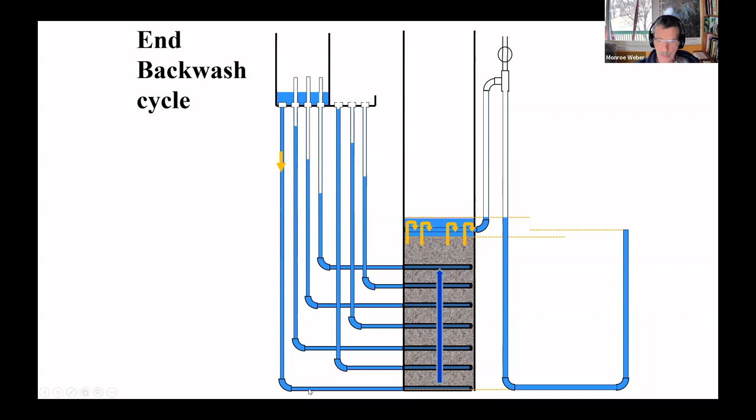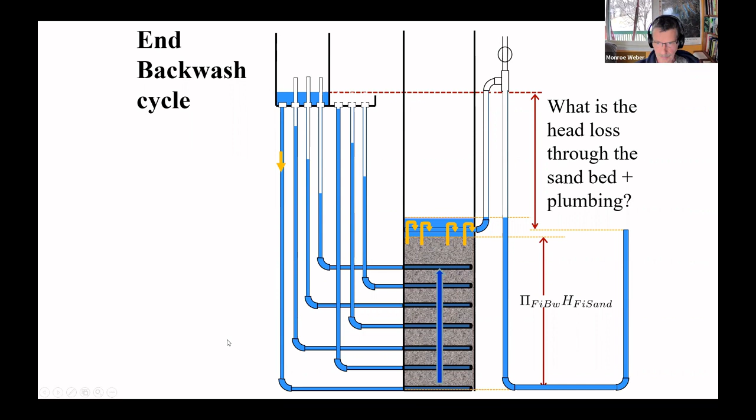That was that. That's the head loss through the sand bed and all the plumbing, both the inlet plumbing and the outlet plumbing through the siphon pipe. And what's this going to be? That is the depth of the sand. So this pi factor is the ratio of the backwash height of the sand divided by the height of the sand during filtration. And so that's the height of the sand during backwash. And I think that's that.

Notice that these pipes here have little pipe stubs on them, and those pipe stubs make it so that their inlet level is higher than the water level during backwash. So that makes each of these pipes high and dry, and hence turned off, because it's not even in the water when you're in backwash mode. If you didn't have these pipe stubs installed, can you see what would happen? Then there wouldn't be any air in any of these pipes.

And can you see what would happen? Remember, water wants to take the easiest path. And the easiest path would be to go in this top inlet, and at that point the sand wouldn't be fluidized, it would just skip all the sand. Do you see this failure? If I don't have these pipe stubs, then when I think I'm going to start backwashing, instead the water says, oh, I'll go in this pipe and pop out right at the top of the sand, and I won't bother fluidizing any sand.

So these little pipe stubs are absolutely critical so that during backwash mode, when the water level is low in the inlet, water can't get into any of the other inlets. It can only get into the inlet that we want it to go in, the backwash inlet.

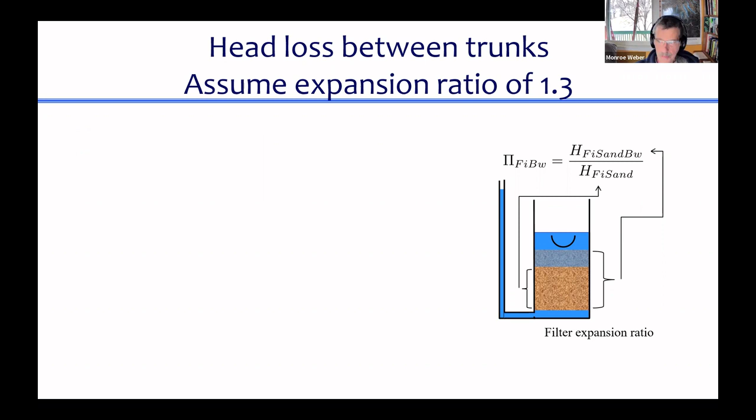So I'm going to use that relationship to figure out what's the head loss between two layers of sand, between two pipes, like between these two pipes, or between two that are adjacent. And between two that are adjacent, there's 20 centimeters of height between them, but there's not 20 centimeters of settled sand when the sand is fluidized. There's 20 centimeters of fluidized sand. And so the actual amount of sand is less. So let's figure out how much equivalent settled sand would be in there.

So we have this relationship between the height of the filter sand during backwash and when you're in filtration mode. So we can solve for the height of filter sand, given that we know the height of the filter sand that's being backwashed between two layers is 20 centimeters. So HFI sand, that's the settled depth of sand. This height of filter sand that's in backwash mode and is fluidized is actually 20 centimeters. And the result is that there's 15 centimeters equivalent of settled sand in between two pipes when it's fluidized in backwash mode.

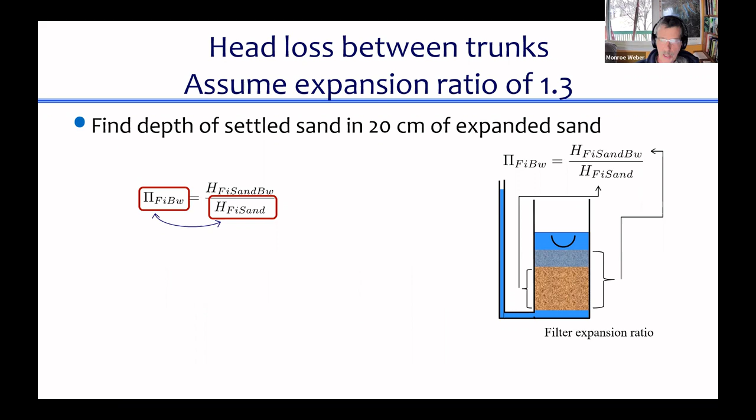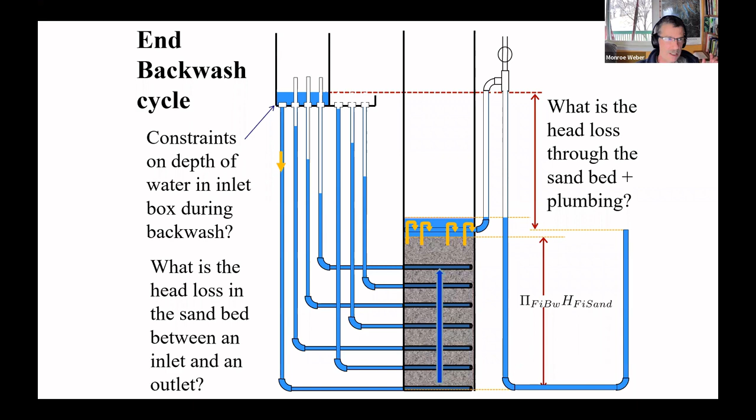So this is the head loss per 20 centimeters of expanded bed. So going back to this slide, the distance between this water level and this water level, the distance between two adjacent manometers, should be roughly 15 centimeters if the filter is expanded. I showed a graph like this a week ago, except it looked different.

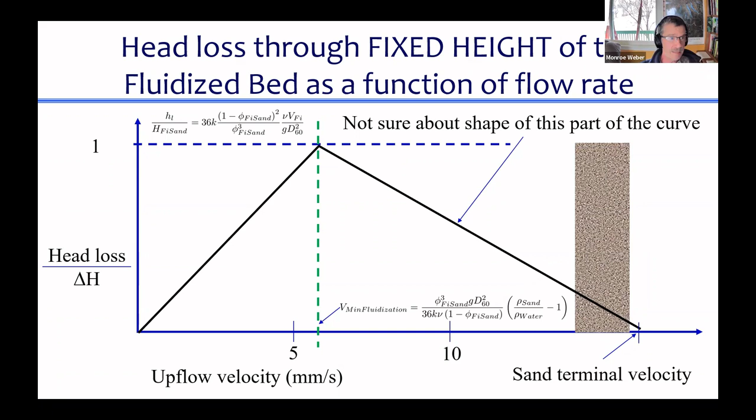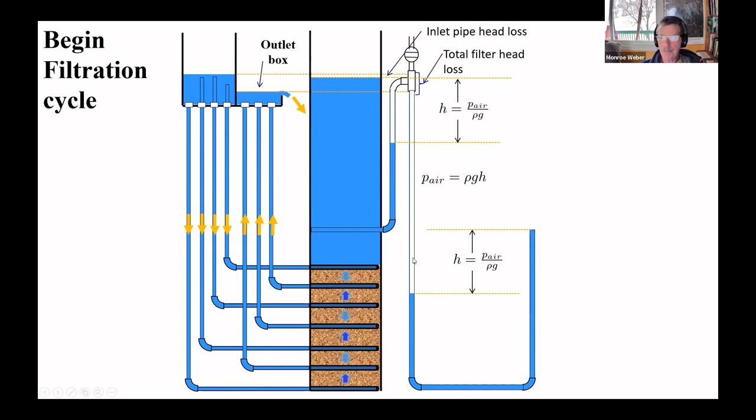During filtration, the water level in the entrance tank slowly rises. The water level in the filter box slowly rises. At some point, you get to a maximum value where there starts to be overflow, and that indicates that it's the end of your filter run.

And I don't know if I'm up to answering this question or not. I have this question here: what causes water to flow through the filter bed? Like, when you look at this, does it seem to you like maybe more of the water ought to flow in the bottom layer of the filter than in the top layer of the filter? Or does it seem like they should be different? Or maybe backwards from what I said? Can you imagine that each filter layer would get the same amount of water flowing through it? Or does it seem like there's no way that will work? Ooh.

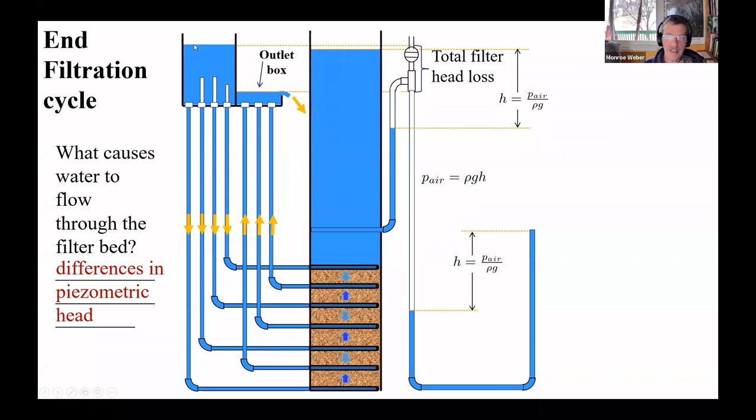I might need to come back to this because I really should have drawn some more stuff on the board, but I didn't. So it's powered by differences in piezometric head, and I'm realizing I didn't define piezometric head nicely for you. Piezometric head difference is the same as the difference in water level between those two tanks. So maybe you believe that.

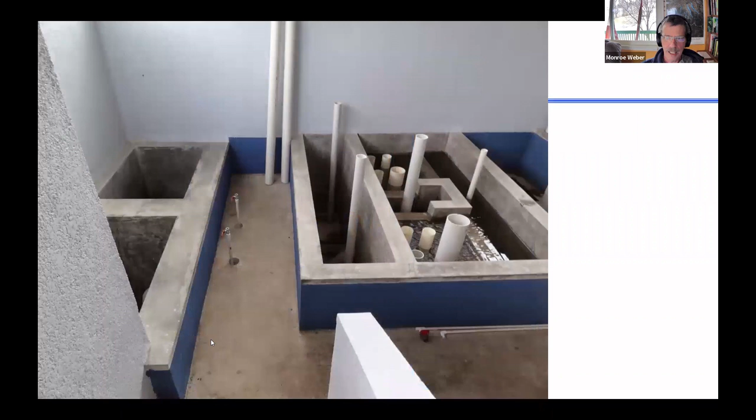Let's just take a look at a couple pictures. So looking at the controls, the controls are in a bad shape right here. This is not normal filtration operation. I can tell you that because this is the inlet box and it's overflowing. And they've got all these plugged, which means that they're actually operating this in bypass mode right now. And I don't know why, and I don't like that.

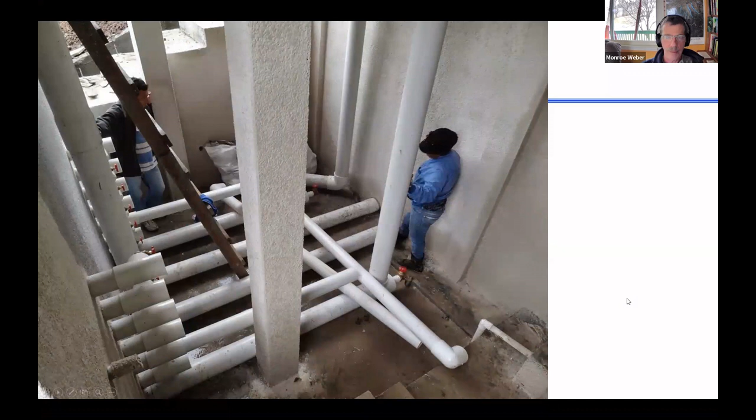Looking inside the bottom, like they call it the basement, it's the pipe gallery. And this is in construction mode, so not all the pipes are installed yet. And you can begin to imagine that it's a lot of work installing all of these pipes in the pipe gallery.

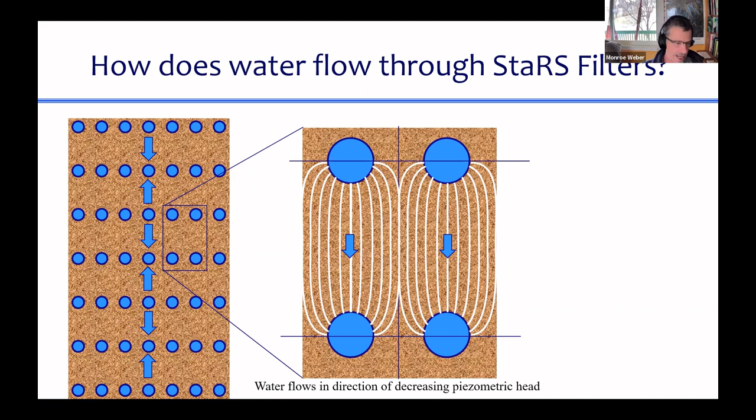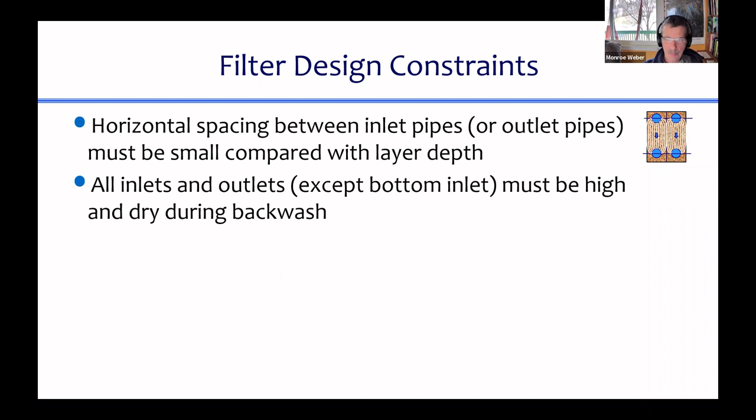And we have not done any research on that. This was just back of the envelope, draw a picture and say, this ought to be reasonable. We know what factor is important, but we've never done any calculations on that. So that's this constraint: horizontal spacing between inlet pipes or outlet pipes must be small compared with the layer depth. And another constraint: all the inlets and outlets must be high and dry during backwash so that they get shut off.